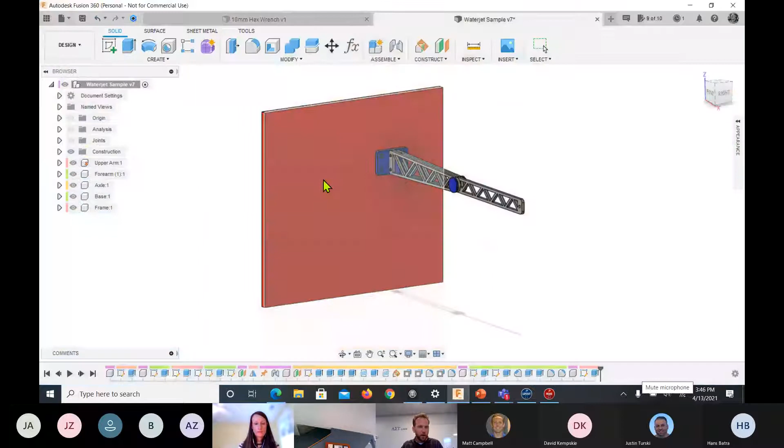Okay, so kind of nice and compartmentalized. I love using Fusion 360 - it's been my tool of choice for years now. What I did here was I started, if I hide everything, with this. This was my main focal point, just to make a part of the arm. And I did a simple mirroring to make two parts of it. But this was pretty straightforward as far as the design goes.

When we're working with files for our specific waterjet cutter, the ProtoMAX, we're really just working with it as though it's like a laser cutter. We have a tool head that points straight down on the z-axis, and we run the tool path and jet water mixed with a garnet abrasive to blow through the material.

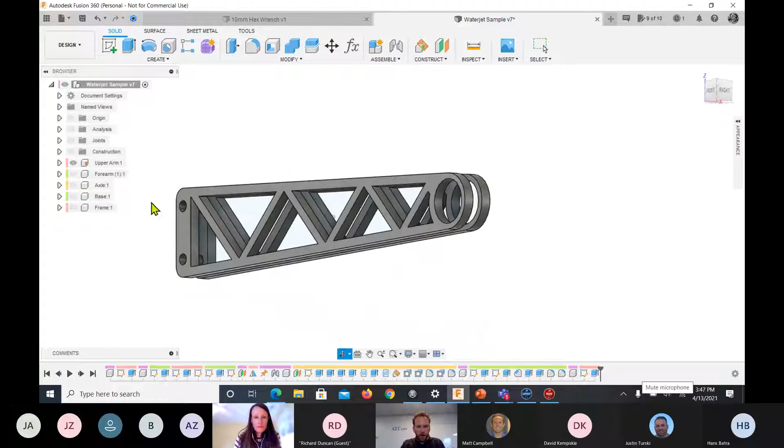After I've done my design in my CAD software, the workflow from here to the water jet - I just want to show you this real quick because it's pretty neat. After I've made my 3D design, I can... hold on.

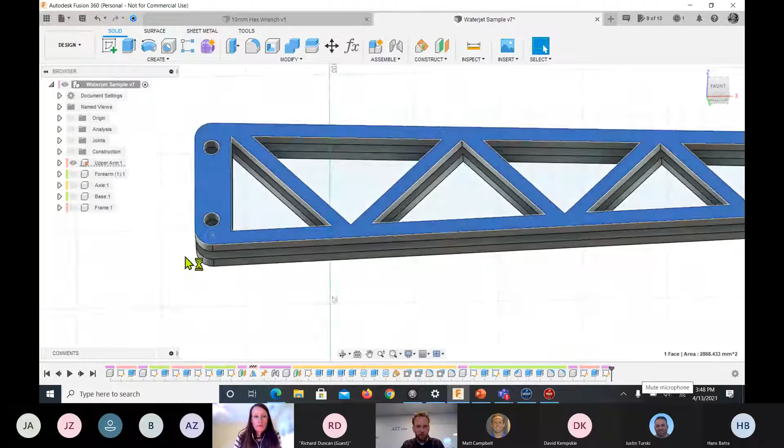I create a new sketch, and my new sketch ends up being a profile. Let's see if I have the right one here. A profile sketch, not what I designed the part from, it's just a sketch that I want to use to make the tool pathing.

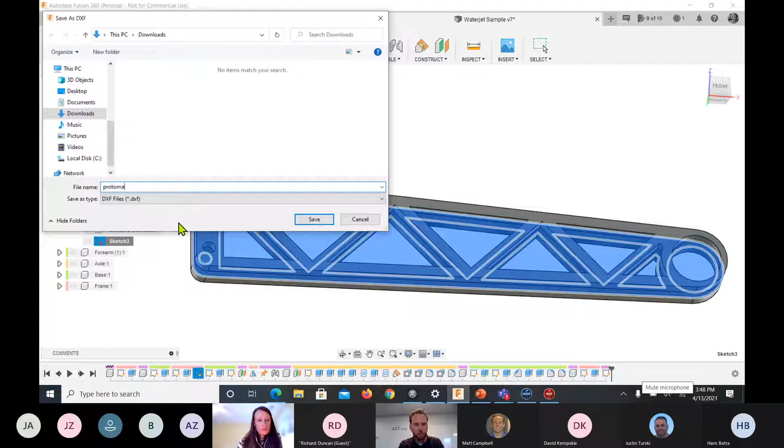So I'll go ahead and save this sketch as a DXF file, which is the only option I actually have in Fusion 360. And I'm going to open up ProtoMAX Layout, which is kind of your 2D CAD software for the water jet machine.

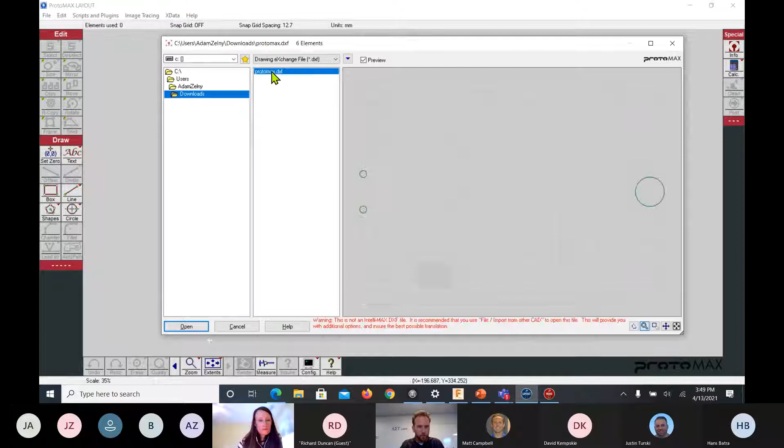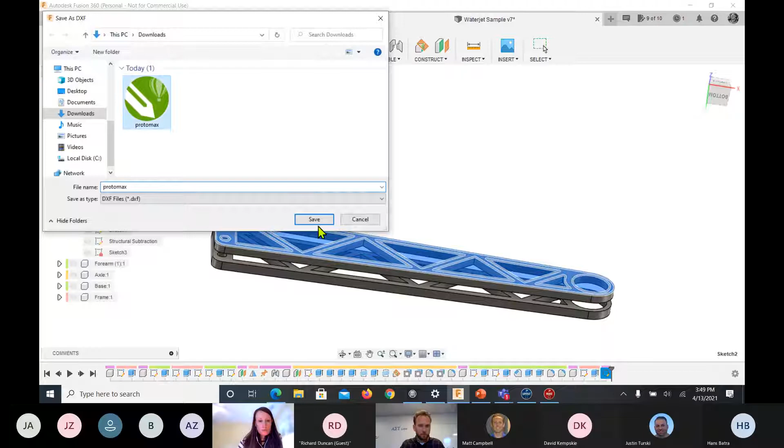Oh, looks like I'm actually missing some stuff here. Sorry, give me one second. Oh, I see, I think I exported the wrong sketch. Oh no, weird. Okay, sorry, bear with me here. I might just have to open up a different file.

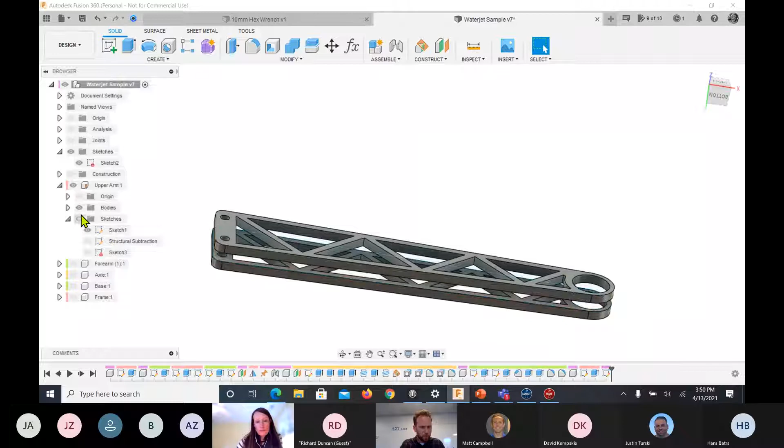Adam, while you're doing that, we have a question. Sure, can you use VCarve Pro for the water jet?

You might be able to produce your artwork in VCarve, but you wouldn't be producing the toolpath. So that's the short answer to that. You could make artwork in VCarve and then export the SVG. Yeah, what I was missing here is I should be importing from other CAD.

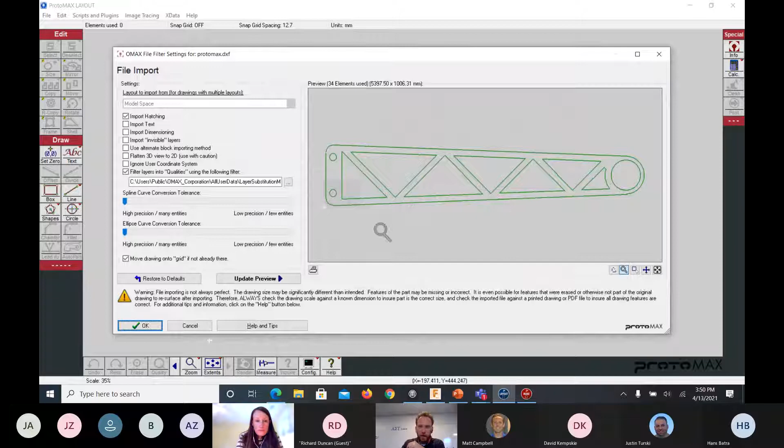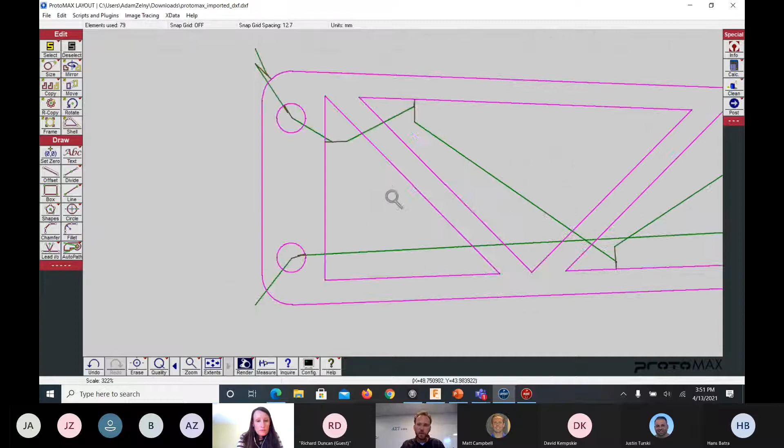There we go, okay, here we go. All right, so here's a preview of my 2D artwork, and this is, I believe, a 1 inch by 1 inch grid space here. As long as my 2D rendering is fairly accurate here, I can just go ahead and click on Auto Path over here. And what we see here is a rendering of 3 different paths.

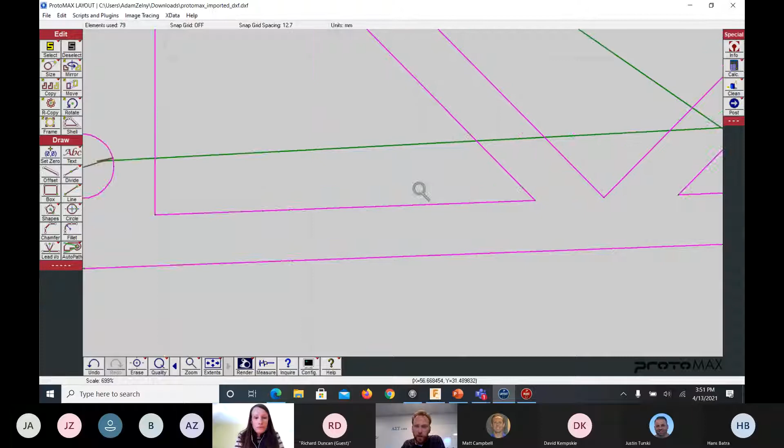We have a traversal path, so where the water jet's tool head moves without actually jetting anything. We have lead-ins right here, these kind of brown lines, and that's when it starts to ramp up and actually jet out the water and the abrasive. And then, of course, pink is what it's actually cutting.

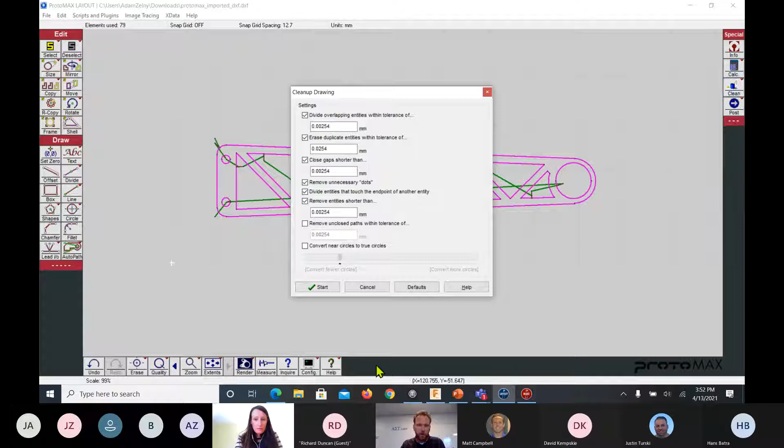You have quality options down here for 1 through 5, 5 being the finest, and you have an etch option too, if you want to do an etching. I'll show you a little piece that I did with that. But at this point, if your artwork is true and your paths look okay, you can even use some simple tools, like cleaning your artwork up here, to just do a check.

And it might go through some checks, like here a duplicate entity was removed. And then I can go ahead and click post, which says pick a start point. And my start point's going to be this spot, this lead-in or traversal point right there.

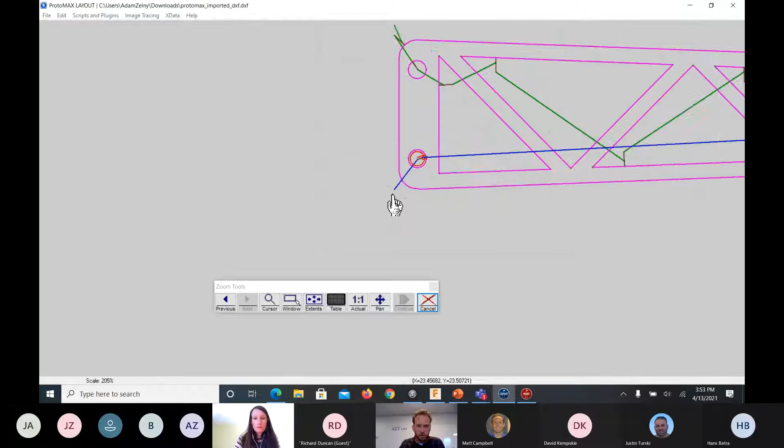Oh, something, I'm missing something here. Sorry about that.

Adam, can you use a 2D vector drawing from Corel Draw or Inkscape instead? You can, yep, you can absolutely. Yeah, what you just saw when I went into file and import from other CAD, you could make your design in Inkscape, you could make your design in Corel, Illustrator, and import it directly into here. Yep.

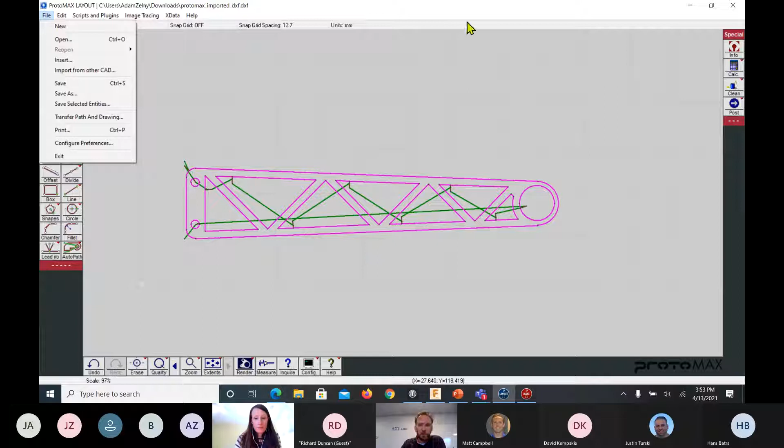Okay, there we go. And what we see here is a rendering of the toolpath. And you'll notice that here it actually renders it. What we're seeing in this kind of pinkish space here is the kerf of what actually is getting cut.

But when we send this to the software that's actually running the machine, it knows that we are sending this to be cut through the material. So what it does is it adjusts the offset of the tool head so it cuts on the outside of the line. So we're getting a true measurement based on whatever we did in our CAD here.

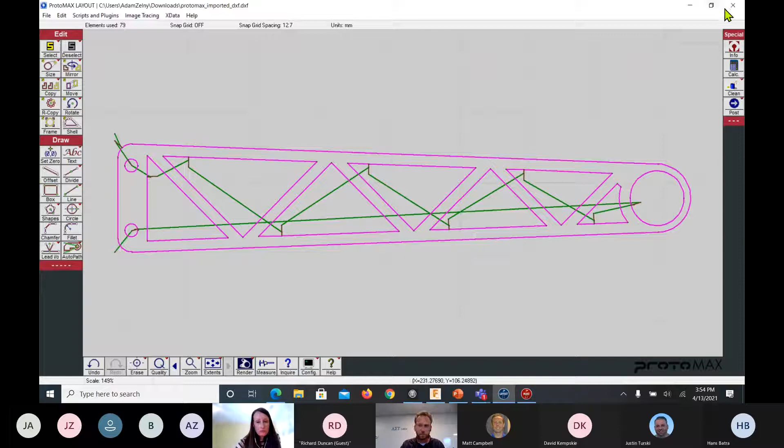Let's save that. And then we switch over to ProtoMAX Make, which is how we're running our job, actually performing it. It's what connects to the machine.

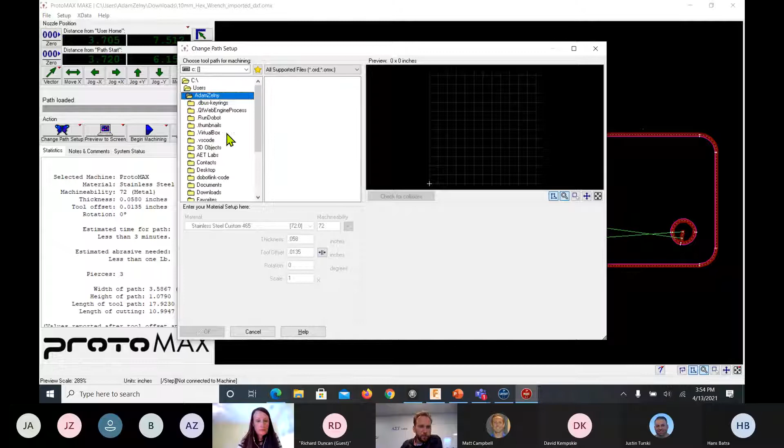And this is my post file here, the OMX file. And though I know I'm missing some things here, it seems like whenever I try to replicate this workflow, nothing ever works out 100% of the time. But you get the gist of it here.

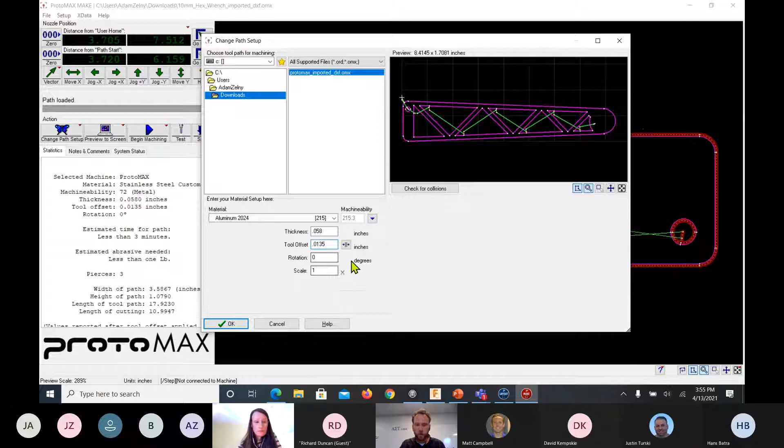So at this point, I would go through and select what I'm actually machining. Today, I didn't actually machine this out of steel, I did aluminum. And I could enter my thickness, which will play a role in how fast the machine cuts, and the tool offset, which is set to a default but could of course be changed. And then I click OK, and I get my final toolpath.

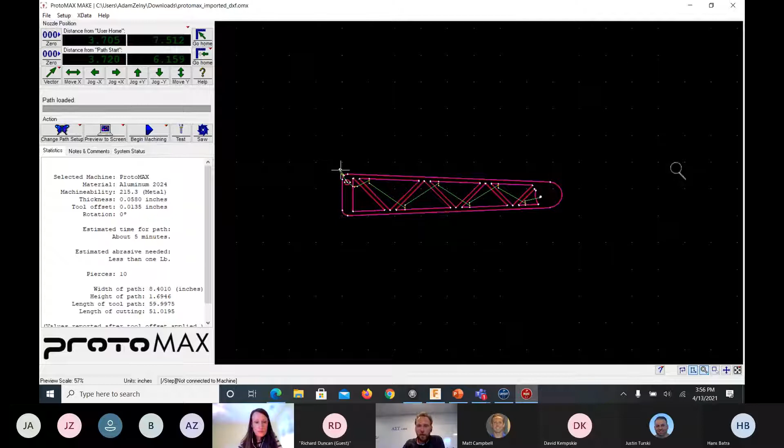At this point, I'm just testing the machine and running the cut. And I may as well just go ahead and show you the video here.

All right, so what you're going to see here is not the toolpath that I just showed you, but this is something that I just cut today. It's just a little hex wrench, and I wanted to do a video of this because it's a smaller job.

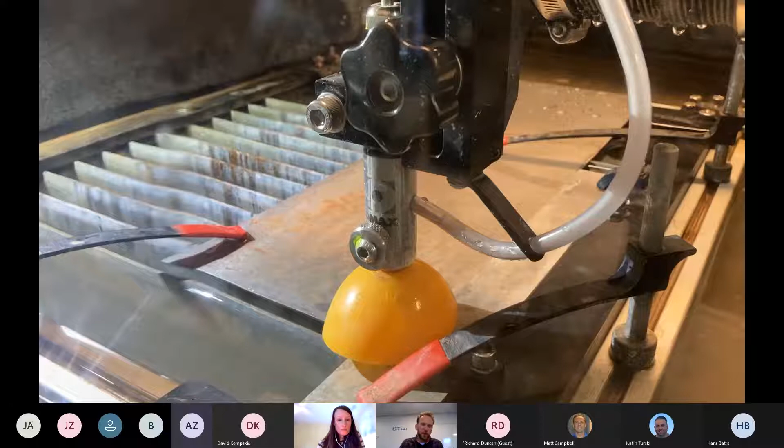Now, this video is kind of more the comedic video because it does an etching, and you'll see why shooting a video of an etching is not optimal. I'll just run it for a few seconds here.

So the etching, because it's jetting the abrasive mix right onto the surface and not cutting through the material, it just sprays water everywhere. So I found out that wasn't going to be a great video for you folks, but it was still fun to shoot and produce a part that I'll show you later.

But what we see here is I removed the path for the etching, and this one just cuts directly through the material. You can see the negative cut here, and this one came out really nice.

And the material, if you can hear me, can you hear me Kristen right now? Yes. Okay, so the material that is being cut is steel, about 1.5 millimeter thick steel, versus the almost 1/16 inch thick aluminum I used for the other part.

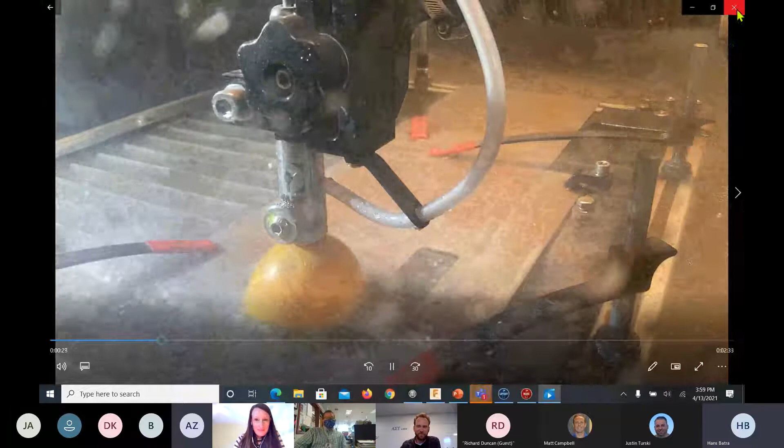Well, I can try another tactic here, so bear with me. Okay. Jim, how about that? You can see it? Yep, yep. Now I can't see it. I hit play and it started playing, but then it disappeared. If you go back to your screen, do you see it? Because now Adam's doing a different way of playing it.

Yeah, you shouldn't be able to hit play because I'm actually playing a video on my desktop right now. So, now that option is gone for me. I can't, but before it was there, it's gone now. And now I am seeing the video that you're playing. Okay, so it sounds like we're good now. Yeah, I bet the issue has to do with me full screening the video. It's a lot of back end technical stuff that somebody somewhere will check in with to figure out. I'm not seeing any video, I'm just seeing the people, whoever's talking. I see, okay.

All right, so I mean I can try this one more time just to see if we can see. Okay, so at this point I'm sharing my desktop, and I have a video open on the desktop. Is there anyone not able to see that? That's good, okay, I can see it. I'm good, I can see it. Excellent. Thanks for bearing with me, everybody.

So you're seeing the jetting actually stops in between different tool paths. So if a tool path ends, or there's a big traversal between two tool paths, it will stop jetting to save the abrasive. The garnet abrasive gets consumed at a different rate based on how fast you're doing the cutting, but just to save the material, it'll stop during a traversal.

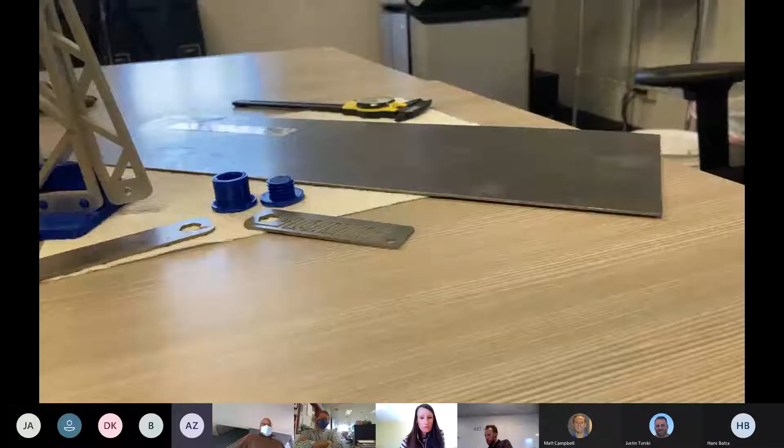What I'll do now is see if this typically works okay. I'm going to share from my phone here. All right, Jim, how's that looking for you? Crystal clear. Oh, beautiful, all right.

Okay, so what I cut today are these two parts here. And that first video I played, that some of you may have not seen, did an etching, as you can see on here. And in the first video, the etching really kind of just made the water splatter everywhere because it wasn't jetting through the material. But you can see the etching is quite nice.

However, on the corners, you see when it rounds a corner, it does a little bit of a deeper mark. So it's somewhat challenging—you're really kind of working on specialized artwork in order to produce an etching with a waterjet cutter that looks very smooth, but it's certainly possible.

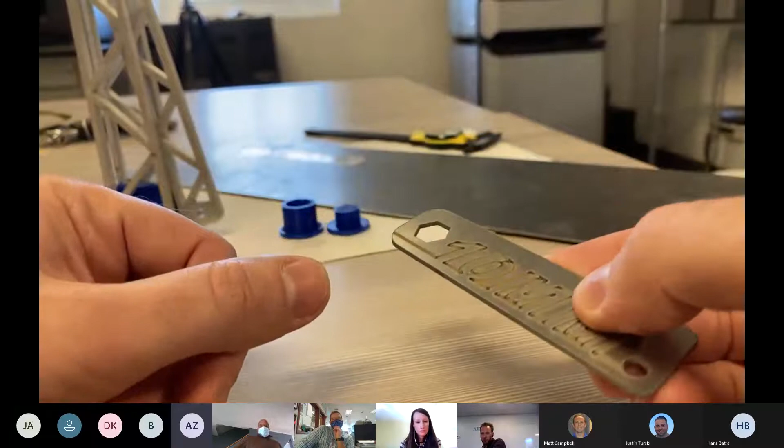This was a really fun little piece to do. And this is just a little hex wrench that I made because there are some nuts in the machine that are used to take the whole bed out. So yeah, this is a nice piece of steel, came out great. And this is the one that had no etching on it, that just cut straight through the material.

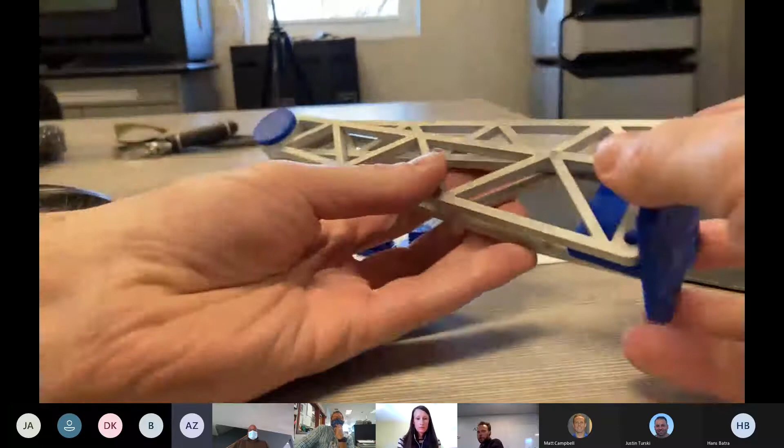All right, and here is the final part of the design I did in Fusion. And it actually pivots very, very smoothly.

And I wanted to talk, before I take some questions and we start talking a little bit about our own projects, the last thing I want to talk about is my 3D printed parts and how I integrated these. So let's see if I can swap back over here.

You could also double as a hand model. I just thought I'd throw that out there. Well, thanks, Jim. That's very nice. I mean, I did my nails especially for today. So.

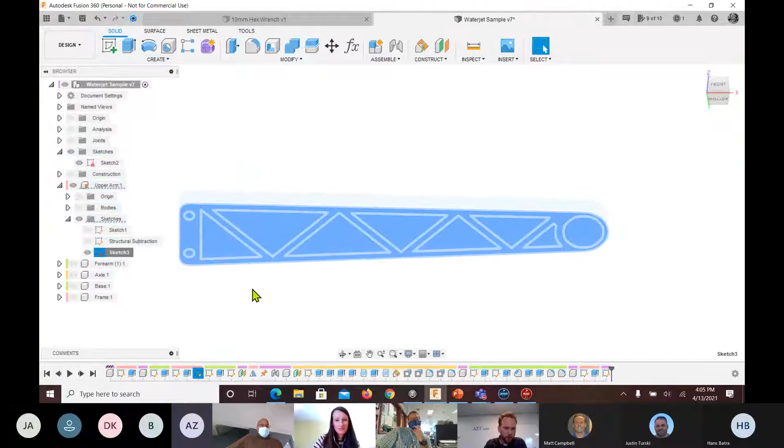Oh, that's good. Okay, let's see if we can get this. Yeah, I bet full screening plays a role here. So can you folks see my Fusion again? Yep, yep, okay, great.

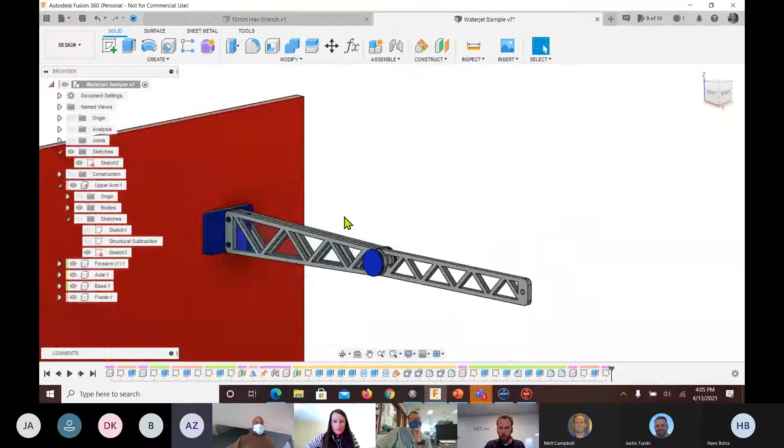So when I went through this process, this is something that if you're working with SolidWorks or Fusion, Onshape—I'd love to hear this from some of you, if some of you high school teachers, how are you integrating joints in your assemblies when you work with the students? That's something I always kind of hit on when I work with assemblies here.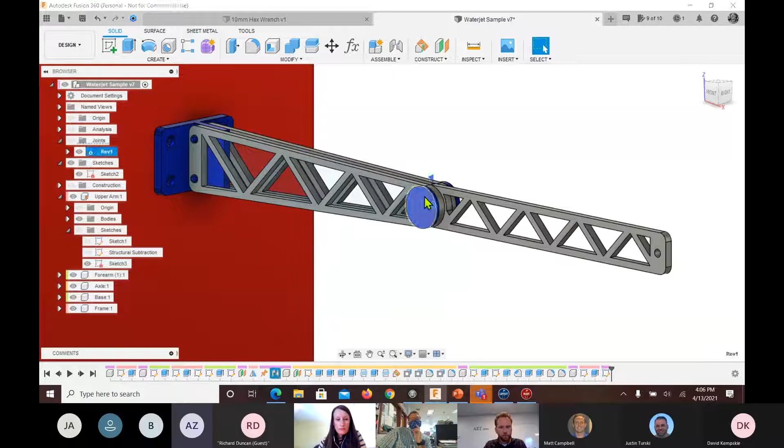In this case, I have my joints up here. Okay, so now I can actually just kind of do a little simulation of how my part is expected to move.

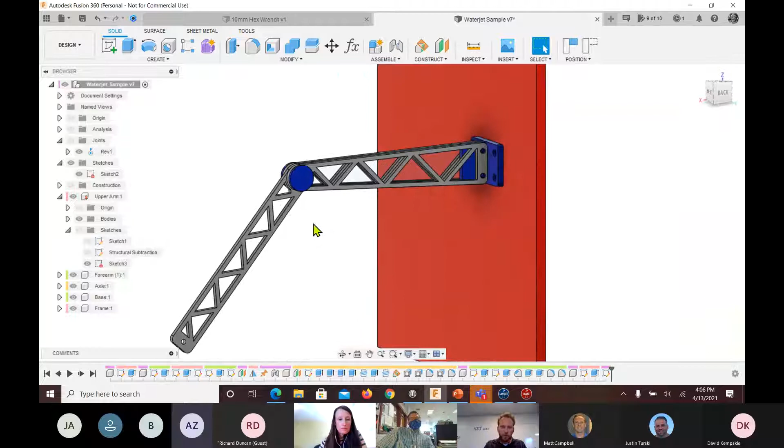So one of the things I want to highlight here, moving away from the waterjet cutter for a moment and onto a 3D printer: first of all, this base piece here was kind of made out of necessity. You can see I put in these little pins to anchor the lower part of the arm on, and really that's not a good solution. I did that just because I didn't have hardware.

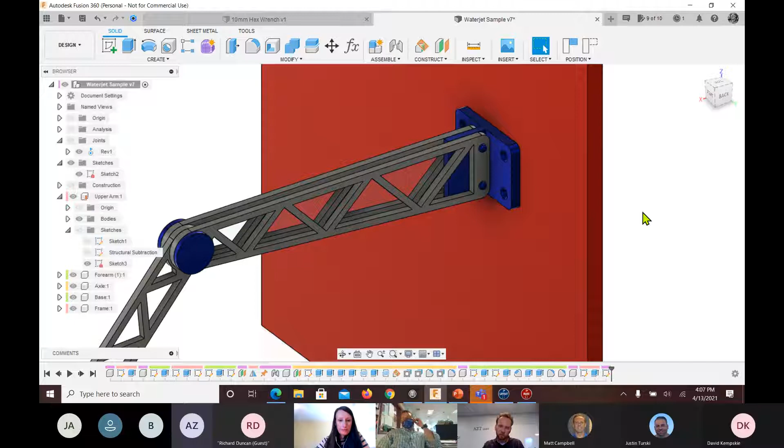Really what I should have done is had just a hole where the pins are and then put hardware through. I did think about this, and I'll try to follow up with Kristen on this, but for those of you using Fusion, if you would like this F3D file to show your students—one thing I think about when I do these quick sample files is showing students and saying what's wrong with it, seeing if they can identify where there might be some hang-ups in the design, how they might improve it. So I'd be happy to share that with you folks.

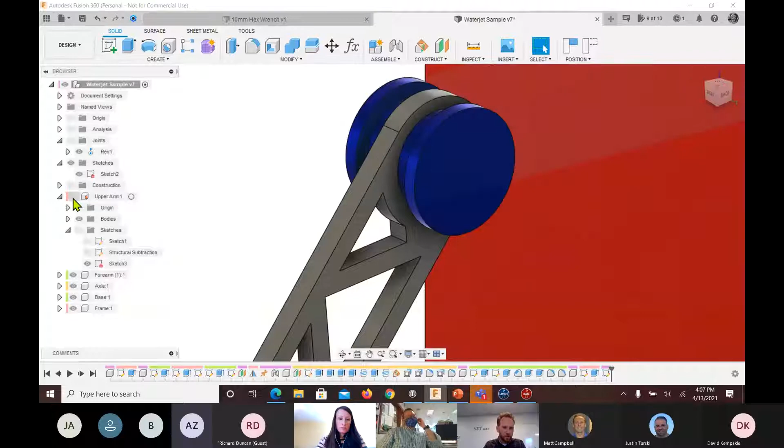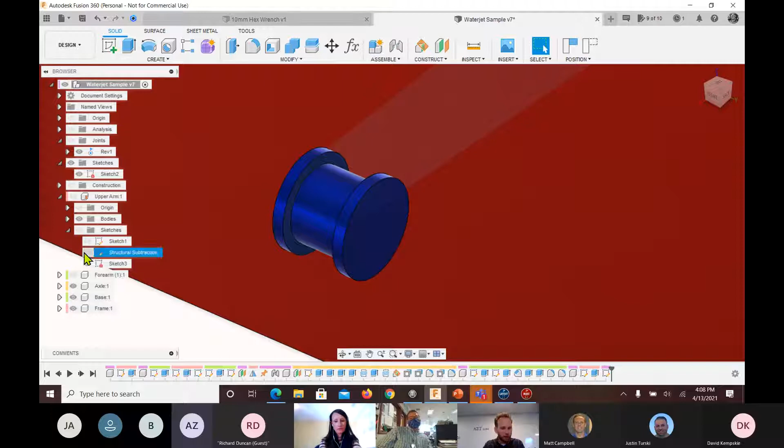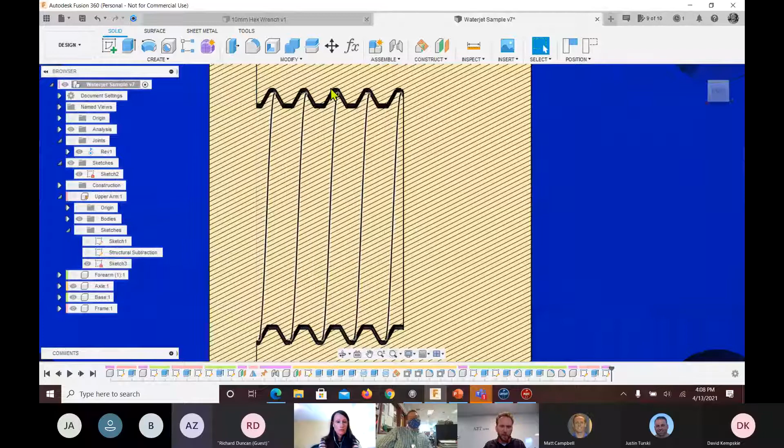And the other thing I want to move on to here is a nut and bolt. So this fixture right here is actually a two-piece nut and bolt. And I was really thrilled about doing this because I printed this on a MakerBot Sketch, which is really kind of an entry-level printer and not as forgiving as far as mechanical tolerance goes. But after learning a little bit more about how I can change the threading—let me bring this up here—how I can change the threading tolerance of where the bolt fits into the nut, I really made it very forgiving and just added some extra space in there, and even kind of curved out the edge of the thread here. So it was a little bit more versatile for a 3D printer.

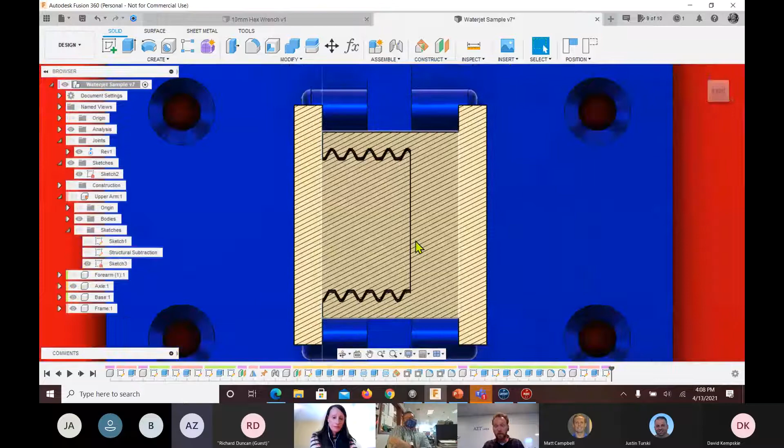And I had a lot of fun doing this. Is it super practical to use a plastic nut and bolt? That's something I'd love to hear from you folks on. I think as far as a designer standpoint goes and for prototyping, I think it's awesome personally. But in the long run, if you're developing parts for robotics projects, where could you use something like this? Where could you actually have a 3D printed nut and bolt?

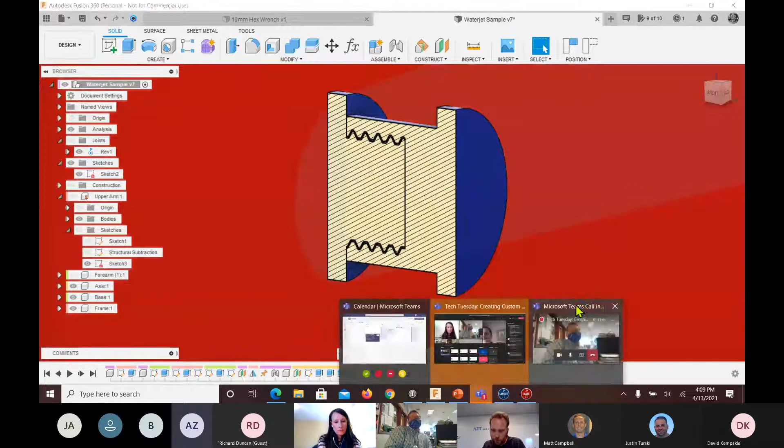So let me pop back out of sharing.

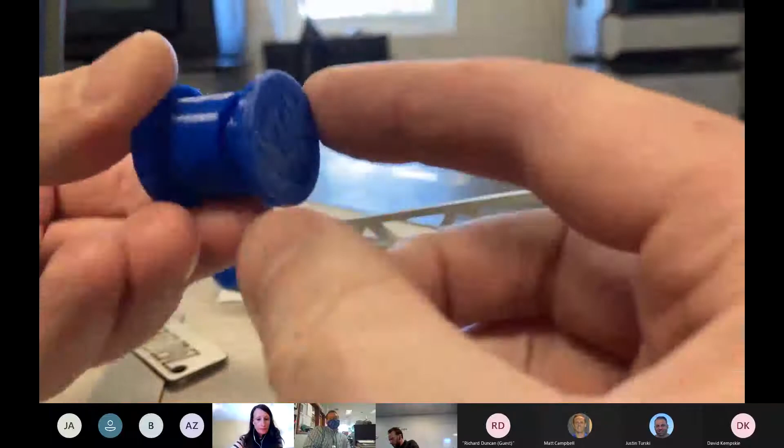Yeah, and here's the result right here. And when I fit this together, I was really surprised at how well this screwed together.

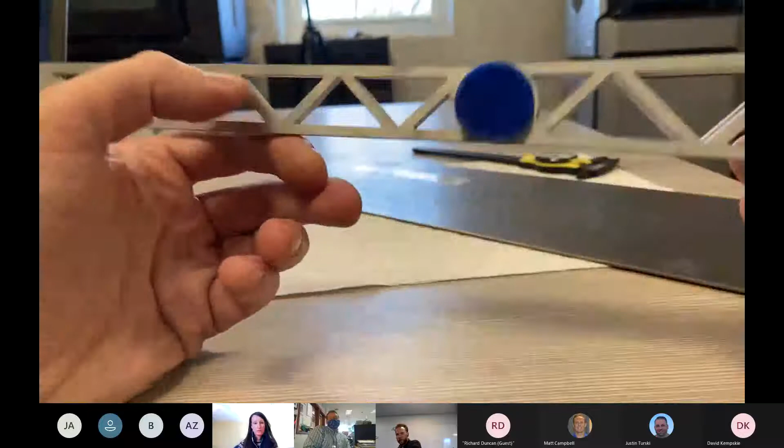So when I thought about this again, this is really a large kind of cylindrical nut and bolt fixture here. A good example would be like if you're looking at McMaster-Carr or some catalog for hardware, or at Home Depot, and you really can't find the right piece. You'd either have to machine it yourself, get it custom made, or design it and 3D print it. And that's where it could come in handy.

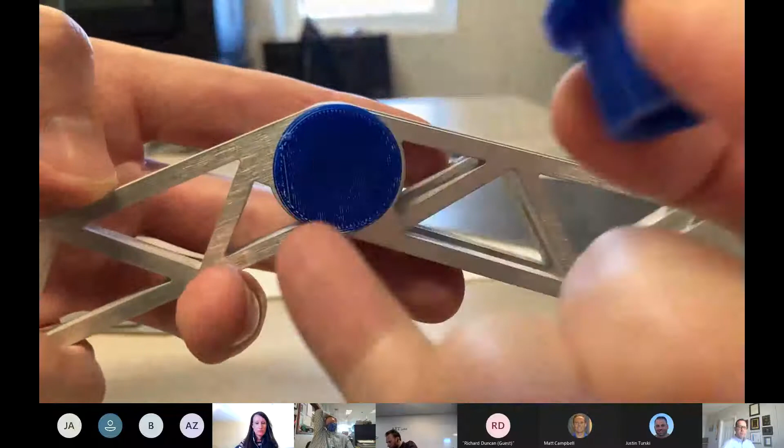The other thing I want to share is the orientation that it was 3D printed. You can see, let me unscrew it here. It was printed with no support structures, which you could get away with if your edges aren't overhanging too much, but also if you have a 3D printer with dissolvable support, you could really print it in any orientation. Because I printed it in this orientation, this serving as a bearing, if you will, against the inner edge of the arms here, it really works well because it's parallel to the direction it's rotating, and it's just very, very smooth. It came out great.

So how much different would it be if it was printed kind of perpendicular? It might be a little bit less forgiving. So that was pretty neat. I think I'll stop here. I want to bring my slides up for a finishing point, and then I'd love to hear from you folks.

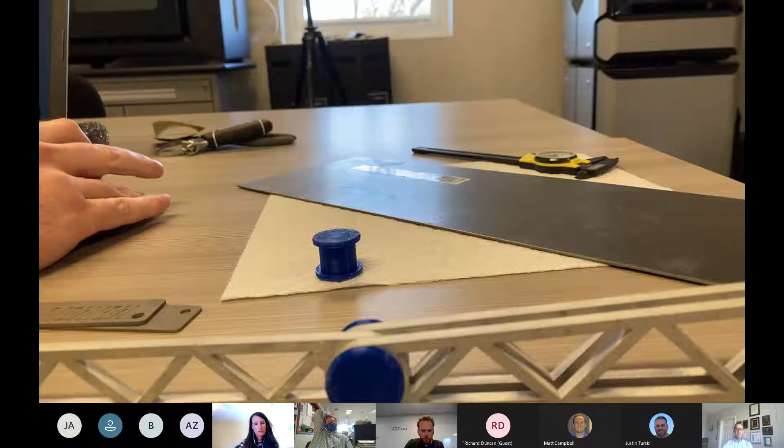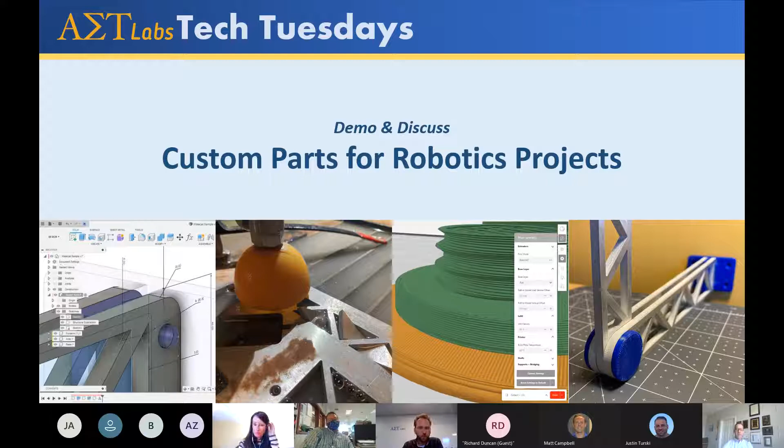Adam, I think a better application, a better printer, a better material for that would be to use something like the Sketch, or for the MakerBot method, or even the F170 using Diran, or the new carbon fiber used on the F170, and also the Method. I think you could probably get some decent results out of that as well.

Yeah, and you have a lot more availability when you're working with printers that have dissolvable supports, right? You just don't have as many limitations. For educators who might have those time constraints, having printers that are more robust and kind of plug and play, you can really focus more on your design, because the output's always going to be the same with the higher quality printers.

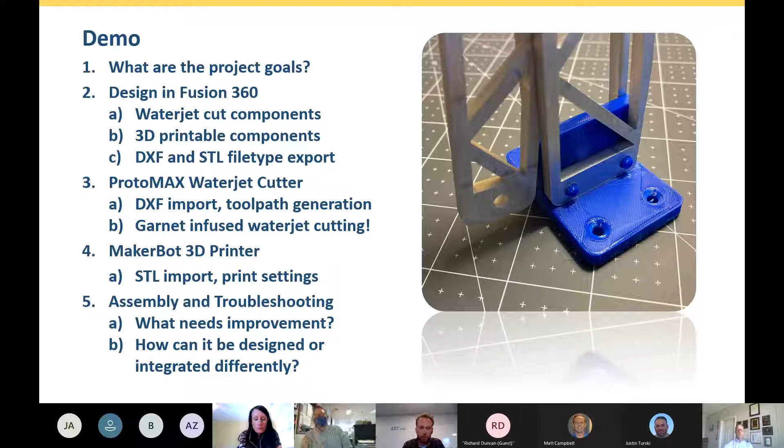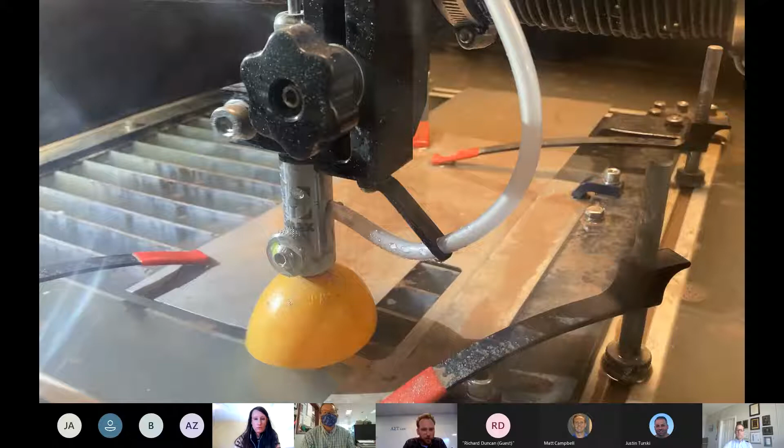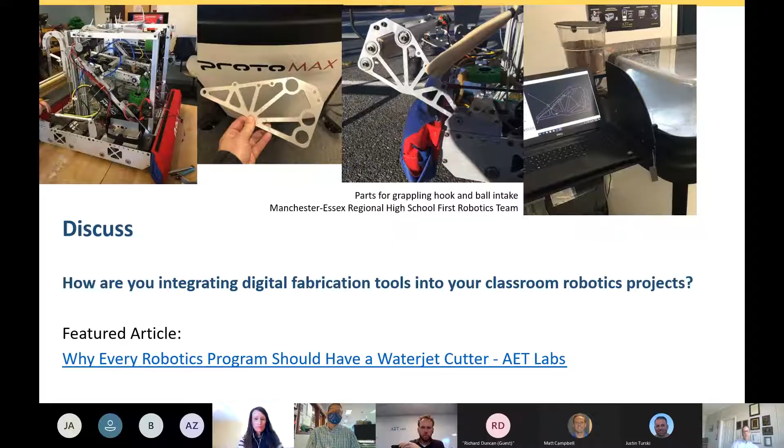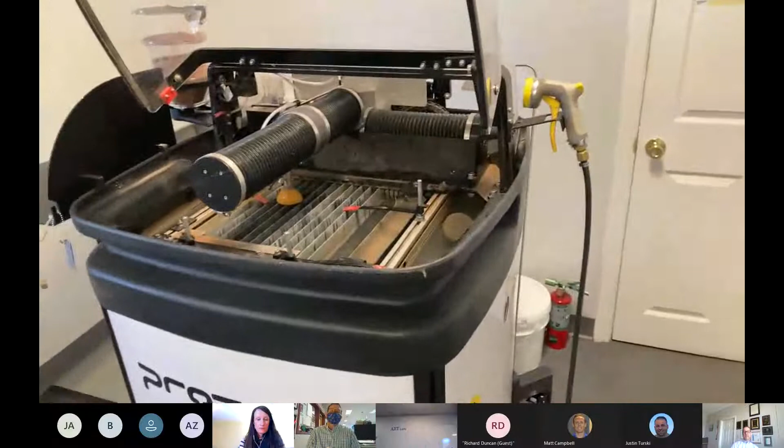But for someone without a lot of experience running the machine, it was really easy to use. Adam, show a quick shot with your phone of the footprint of this machine. The machine itself doesn't take up that much room. Jim, you've got yours in place there, and I was surprised at when we first got ours, for what it's capable of doing and the little space it takes up. It's not like the Waterjet cutters that are 4x4s or 4x8s, this is certainly not like that. But for a lot of projects, for 12 inches by 12 inches, you could do things a couple inches thick. It'll serve the purpose for robotics projects, that's for sure.

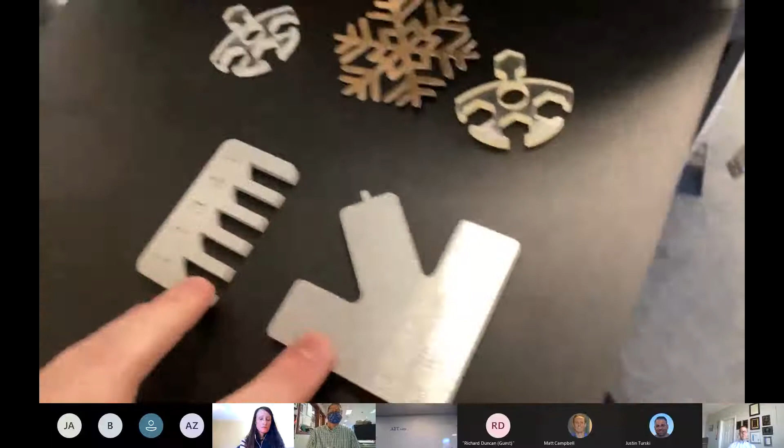These are some more decorative pieces here, and these two here I did for really just calibration parts. This one came with the software just to see how true a 1 inch measurement was on the X and Y axis, and then the diagonal.

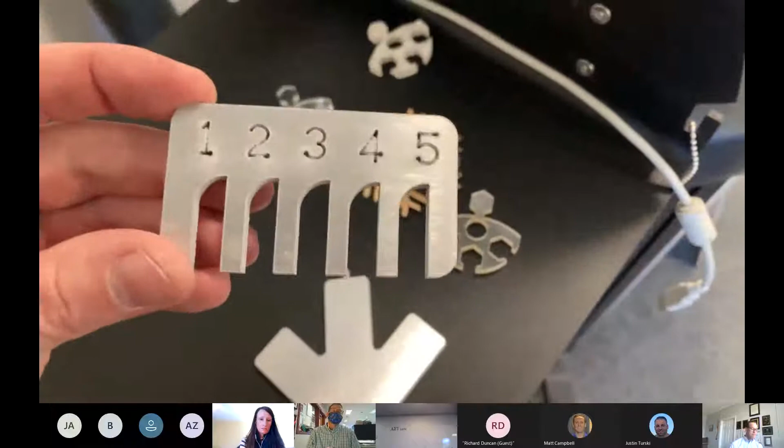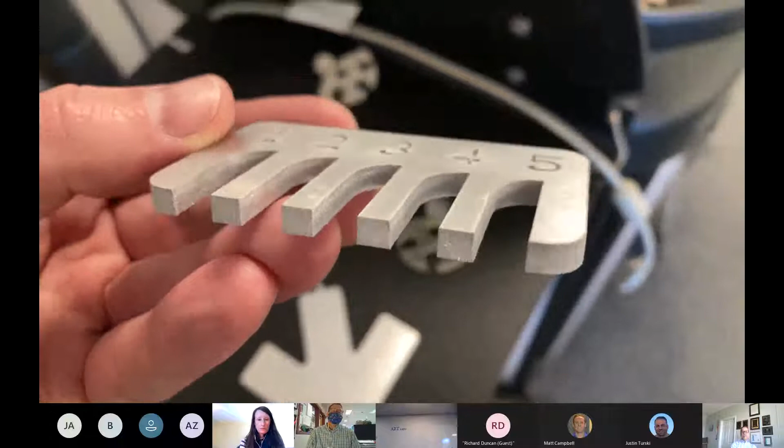And then this one here was me testing the quality levels, with 1 being the roughest and 5 being the finest. It's pretty tough to see, probably, but 5 is definitely a lot smoother.

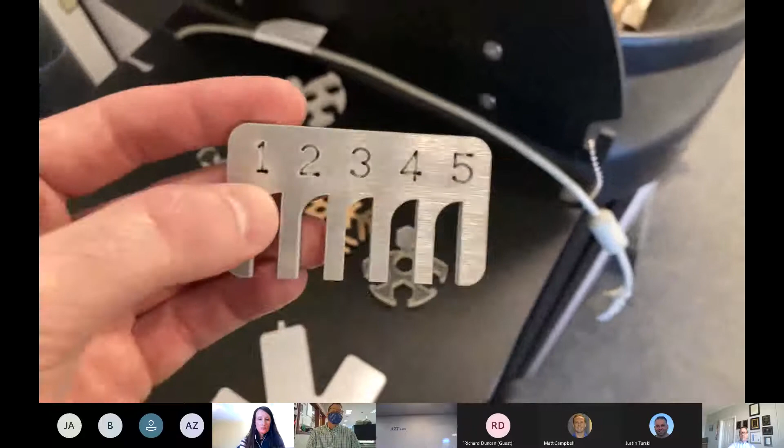This was also me learning about how the Waterjet works. If you just start trying to etch with the Waterjet with a free-floating number or text like this, there is no lead-in. It has to have a lead-in, which is an interesting part of the tool. So the lead-in happens on the number, and you can see that it just actually blows through the whole metal.

So that's why I went off and produced this part, to learn how to navigate a smoother etch by leading in from the outside over here. And it certainly looks much nicer.

While I have the cam up, any questions? Anyone want to jump in with water jet related questions.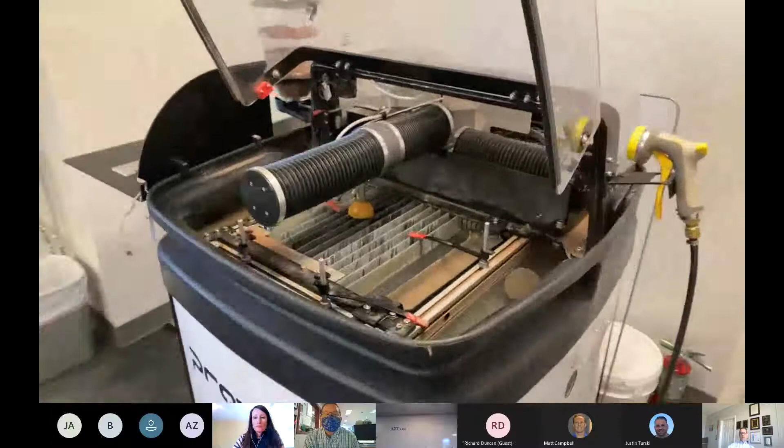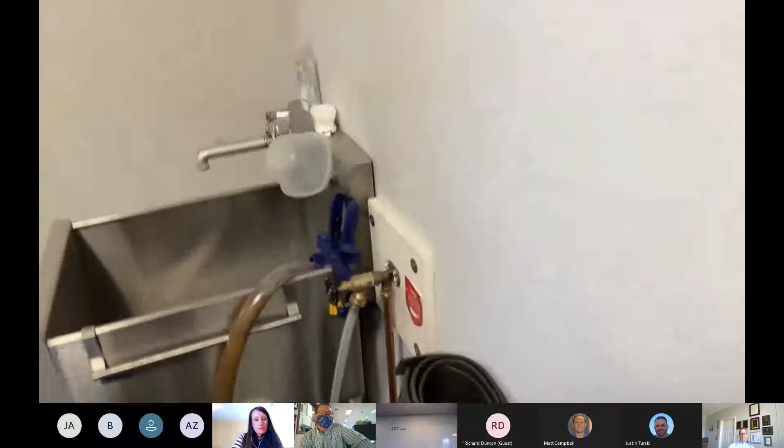Maybe we could just show utility hookups on that. Sure, yeah. So we have one, just one water line going into the machine here. And that serves both the jetting and this kind of peripheral hose to fill the machine and rinse it after you're done, which is pretty nice.

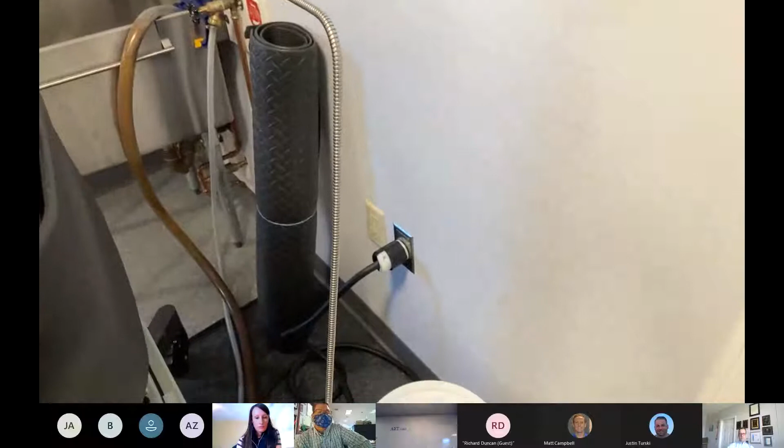And I think we're at a 220 power supply, Dave, is that right? 208, I think. Okay, yep.

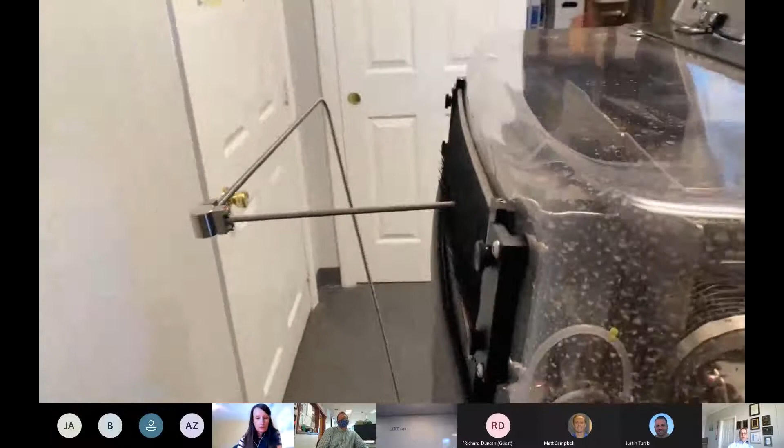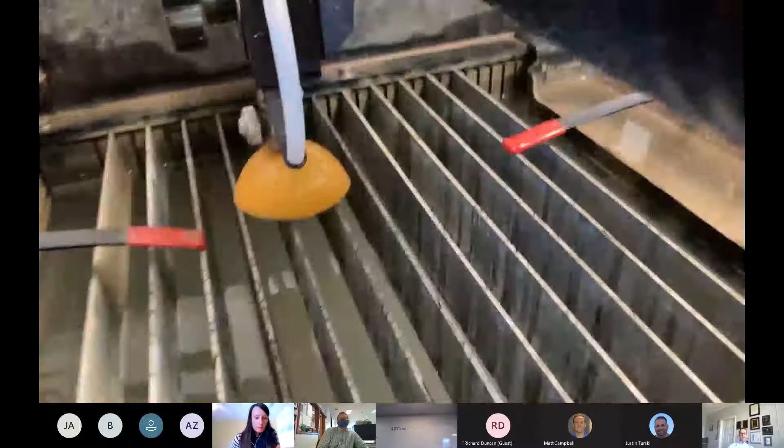One of the things about the machine too, in terms of space planning, you need to have a little bit of space in the back of the machine. Look at that line right there - that line will go in and out, so it's under high pressure. This is the water line that supplies, that comes right from the pump up to the head, and it will actually traverse in and out based on where it is, so it's got some flex to it. But you'll need probably about 18 to 20 inches of space in the rear of that machine to give it room.

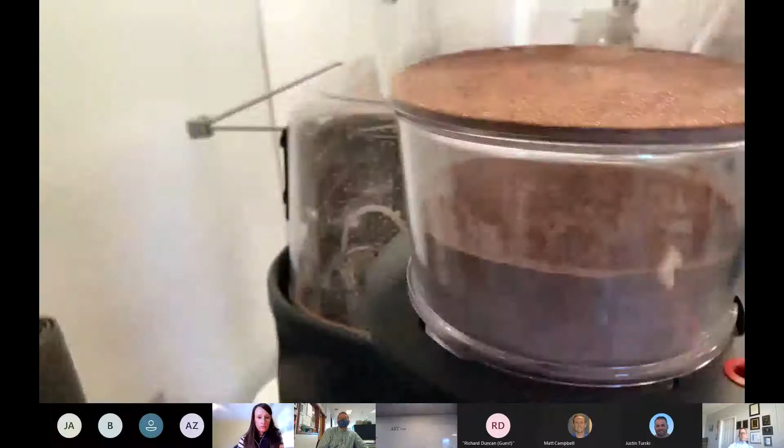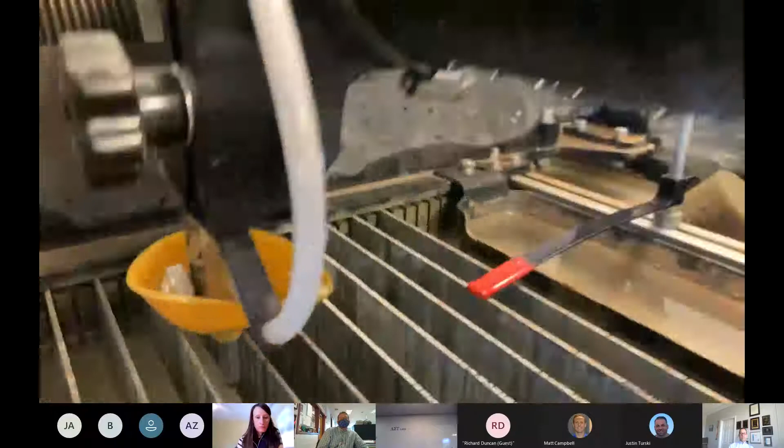And this is our garnet abrasive hopper right here. It's pretty neat to work with this. One part of the technology that I'm kind of blown away by is that as the machine is jetting, it produces a vacuum that brings pressure on this tube here and sucks the abrasive straight through the tube, mixing the water jet with the abrasive at a very smooth, equal level.

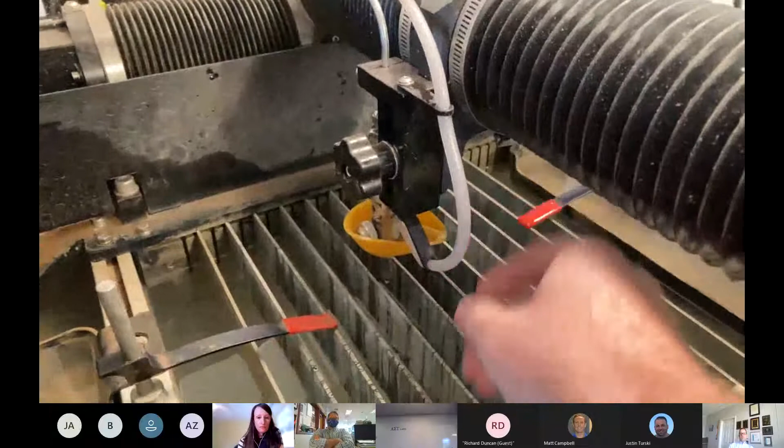It's pretty neat, and you can see there really aren't too many materials that will resist this. Even the slats in here that are used for the bed take a beating, but they last quite a while, I would say. I actually just flipped these recently.

So yeah, I'd love to hear from anybody if anyone has any questions, or if you're eager to share what you've been working on. That's something that I've really been wanting to make these meetings about - having a good chunk of it about teachers sharing what projects you're up to. It doesn't have to necessarily be on waterjet or 3D printing. It could be anything.

I can share - I was working on a project for the Boys and Girls Club where we were building, using a 3D printer, a MakerBot and a Dremel, to make prosthetic hands. The designs were already made, so this was just a project where you were supposed to size it to a recipient and then scale up or down the parts to match the size for the person's wrist. These are people who were born without a hand. I forget the name of it, but it's kind of a nationwide project - it tries to match up anyone who has a 3D printer with a potential patient or person who needs a prosthetic hand.